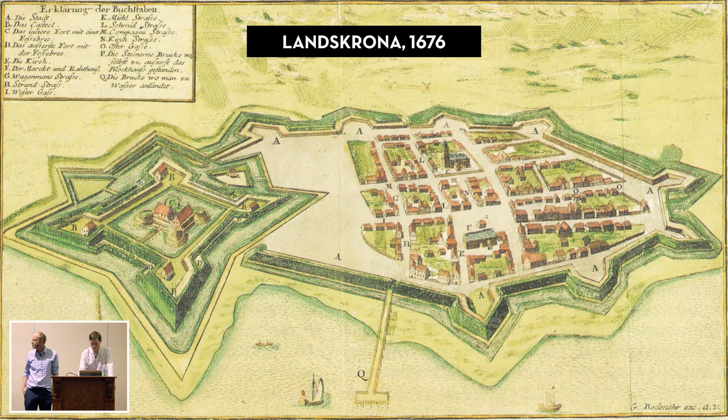The city of Landskrona tried 3D modeling. They wanted a 3D model of the city, so they tried 3D modeling for years by themselves. However, they did not succeed. One reason they failed could be the state of the computer equipment. Or it could be that they indeed have somewhat more up-to-date computers in another room, but good 3D modeling is hard.

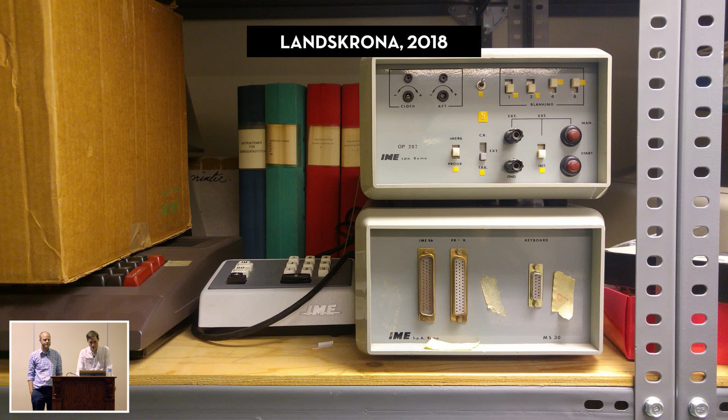Now, we didn't want to commit the same mistakes as others have made. So here's a mini presentation: the fumbling city, misdirected urban modeling for 3D printing.

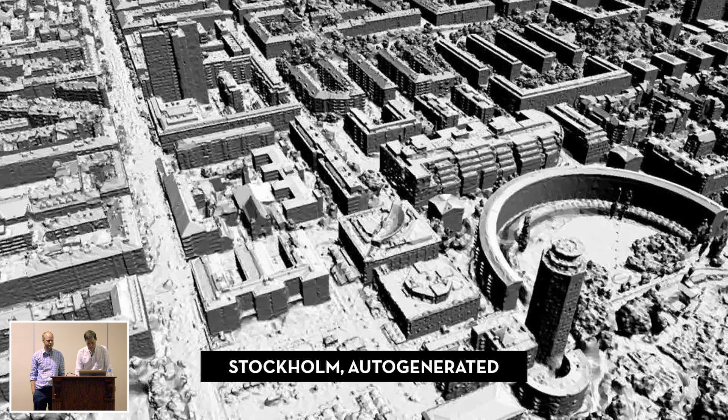So let's avoid those costly mistakes. Is there a one-click solution? Say you've got a point cloud. The dream would be to click a button and then get a city out of it. And it is indeed possible, and this is what you get.

This becomes very quickly an indiscernible lumpy mass which tires the eye. This is a sort of holy grail within digital city making, so there is much research going on in this area, but there is no satisfying solution. Why? Computers are stupid. They lack the interpreting intelligence that is needed to make a good city model. They cannot create aesthetically meaningful choices.

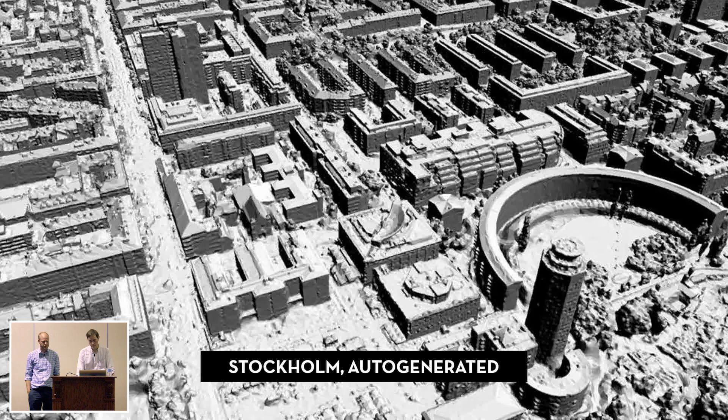So in sum, automatic generation makes you unhappy. You need to do many things manually, but some you can do automatically. Here's another city model. This is Birmingham.

This is obviously 3D printed and 3D modeled. It's colored, but perhaps not so very thought through. It has a certain lack of unity, and there is, I don't know, a bureaucratic and perhaps even joyless character here. You can't really tell what is a road and what is a waterway, and so on. Yet this costs a lot of money.

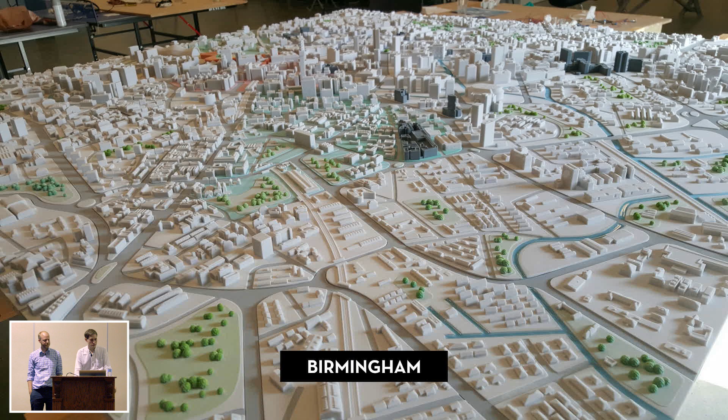And the third example, it's Malmö. They're using the same 3D printer as we are. Their geometry is somewhat better, but look how they have, what have they done with the textures? The materials are functionally unseparated, so visually it's unhierarchical, and it becomes sort of a mulchy mess.

If you look close, the details may or may not be right, but if you look from a distant overview, it's unreadable. Why is that? They've taken probably fairly good 3D geometry, and then they've draped aerial photography on top of it—satellite photographs and perspective photographs and so on. And that makes it hard to read from a distance.

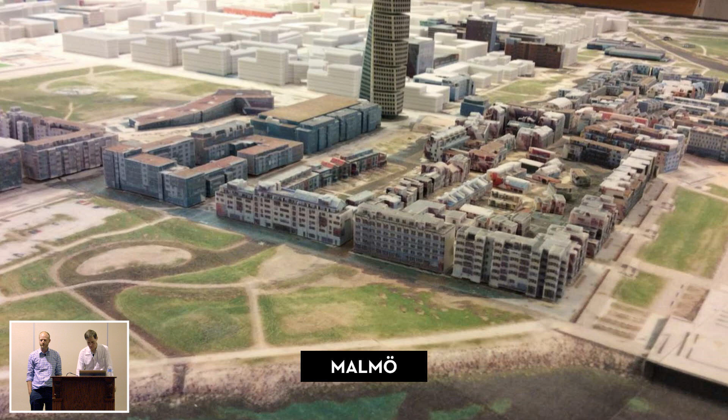So, what's our approach? What is a good city model then? There are some technical criteria. You need empirically correct geometry within, say, a decimeter, depending on the input and what the client needs. The output needs to be 3D printable, i.e. all solids. And the parts need to be individually replaceable if you're making something that consists of several prints, as we did.

What's this? This is a traditional hand-drawn 2D watercolor that we made for another client a couple of years ago. This is no city model, but it's a starting point. What we're after is a sort of effortless visual navigation, yet containing fascinating details.

Discoverability. So it should neither be too cluttered, as we've seen, nor too sterile, as we've also seen. A good model speaks gently. It doesn't scream, and it doesn't whisper. It speaks gently. So colors are really important here when it comes to design.

Judicious simplification is the way to go, and embrace some sort of mild idealization. That makes it readable. Plain, untextured colors work best, that separate functions, yet unifies the whole.

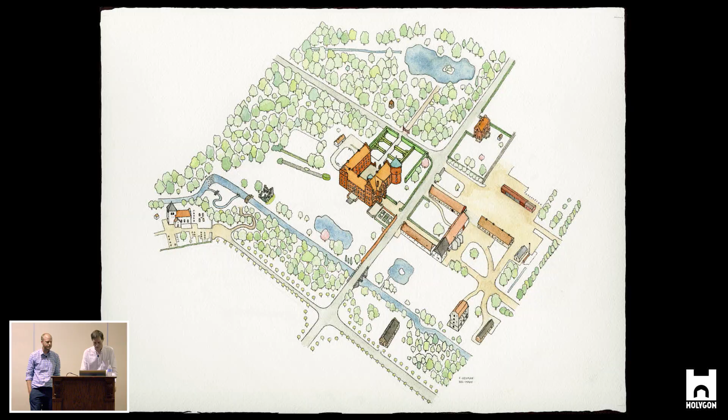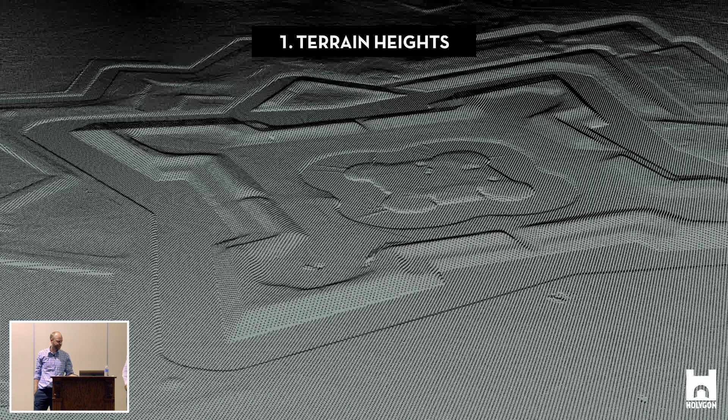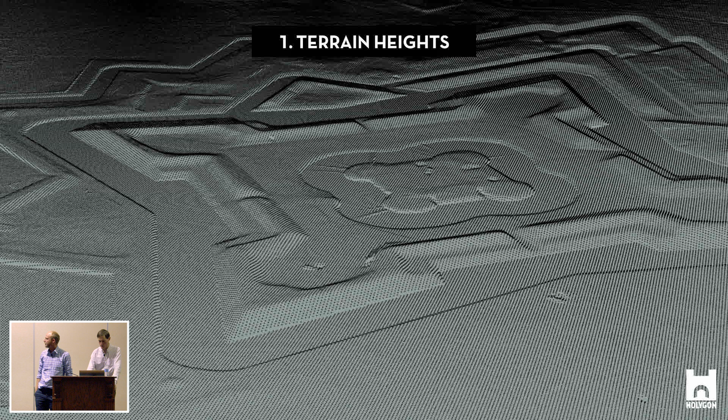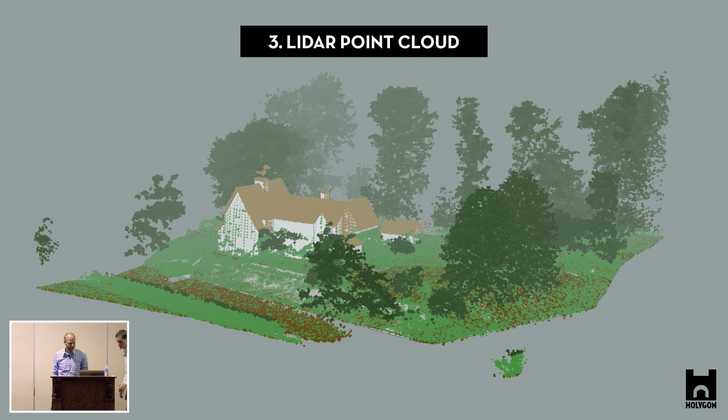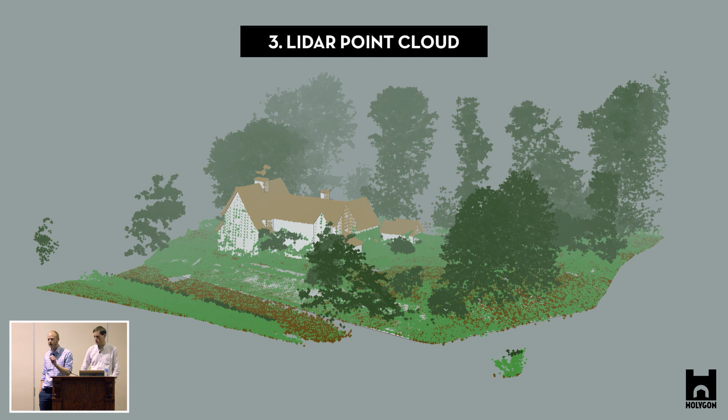And here we have the third input, which is a 431,113,425 point point cloud. And you see just a little chunk of it here. And this point cloud is obtained with a drone, and you have a small laser scanner on it, and it shoots out small laser pulses. And you measure the time it takes for the laser pulse to bounce back, and then you get the point in 3D space.

So, but input is not enough. You're also required to produce some kind of output. And in our main modeling workflow, each input gives rise to an independent modeling track. So in the end, we end up with 3 master models. And these individual tracks have synchronized coordinate systems and so on, so we can just paste in place between them.

And we model in 1-to-1 scale already from the start. And the first modeling track is the terrain. And this is the final state of the terrain. And as you can see, the model will be circular.

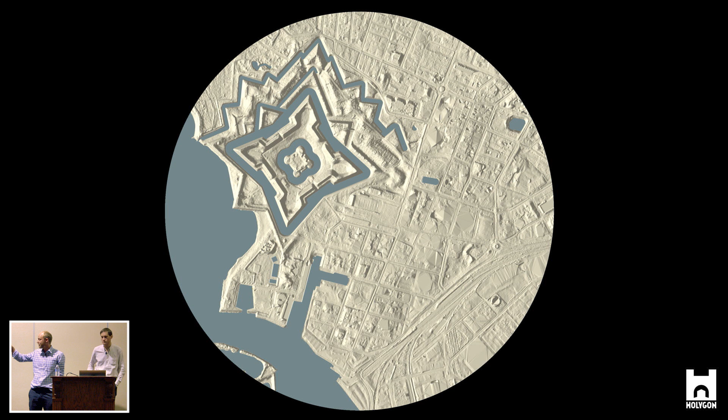It's 1.6 kilometers across here. And in the end, we model in scale 1 to 1,000. So the model will be... We don't model it, we export it. Yeah, we export it or print it in 1 to 1,000. So in the end, the model is 1.6 meters across.

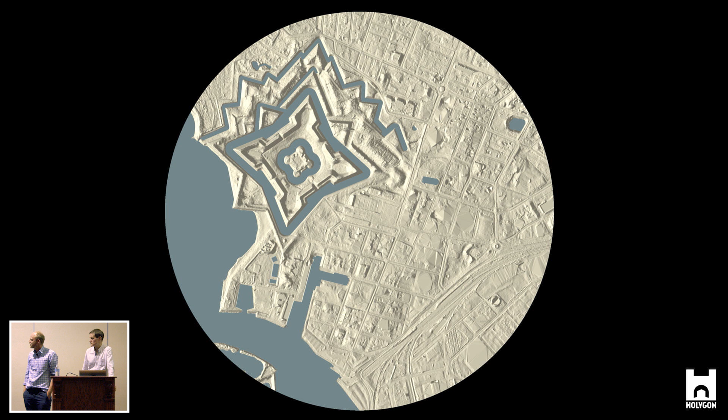And the terrain as we received it was really excellent, but there are bound to be some problems, especially along the coastlines. So here we can see a close-up of one of the moats surrounding the citadel. And what you see in the middle is water, and you can see the vertices on the water. They are extremely jagged.

This is just an artifact from the terrain model, because when you have steep sloping terrain in a regular grid, you will get these directional artifacts. You can also see some other directional artifacts higher up in the terrain.

But we had to fix this, and the way we did it was we wrote an extension that takes all the points lying on the water surface and adjusts them to the red lines here. The red lines are idealized coastlines that we got from the orthophoto. And this was actually very important.

First of all, because those artifacts are visible in the print, even though we print at scale 1 to 1,000. But even more importantly, we do not want to print the water with the rest of the model. Instead, we want to make a cutout into the terrain to insert water of another material, like acrylic glass. So we really needed very smooth coastlines for this to work.

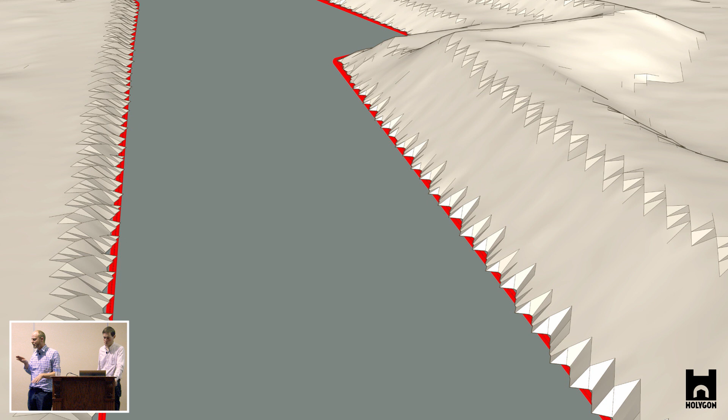And to fix the other directional artifacts higher up in the terrain, we employed very careful smoothing. So we smoothed the vertices. But you have to be careful, because smoothing basically lessens the difference between adjacent vertices, and if you do that too much, the terrain will completely lose its distinctiveness.

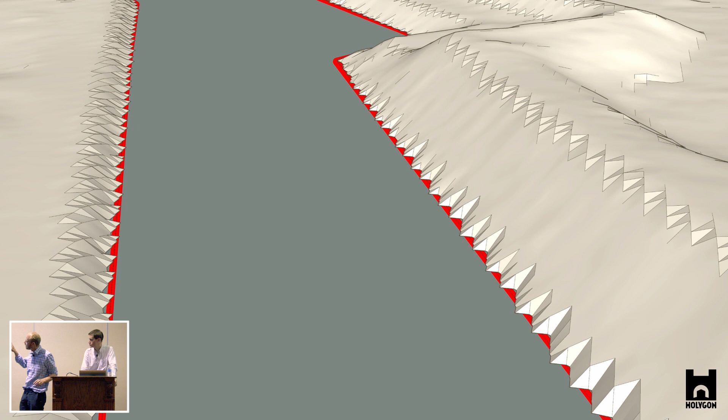So conceptually, what we did was only smooth vertices connected to two visible edges in this image. That way, we only smooth where we need, and all other vertices are left as is. This is the result. There are still some directional artifacts visible, but they're not visible in the final print, so we were quite happy with this result.

The second production track — and do note that these production tracks are independent, so one guy can work on one, and another guy can work on another track. Then in the end, you paste them in place and make a master model.

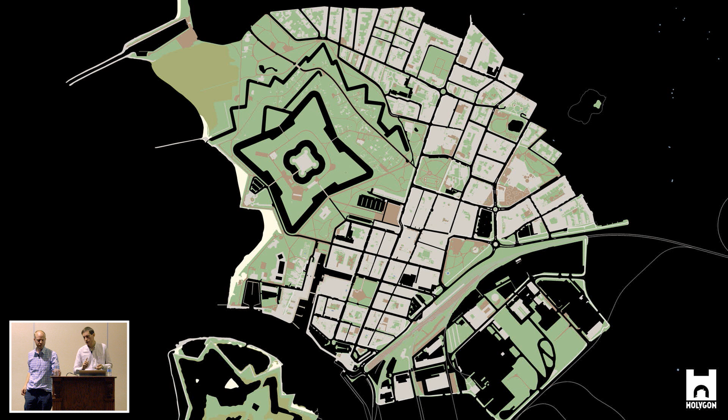So, ground types. You start by picking a number of ground types that represent the entirety well. We had about a dozen ground types — stuff like grass, curbs, roads, gravel, reed, and so on. These were traced by hand on top of the orthographic photo that we showed, and it's all 2D.

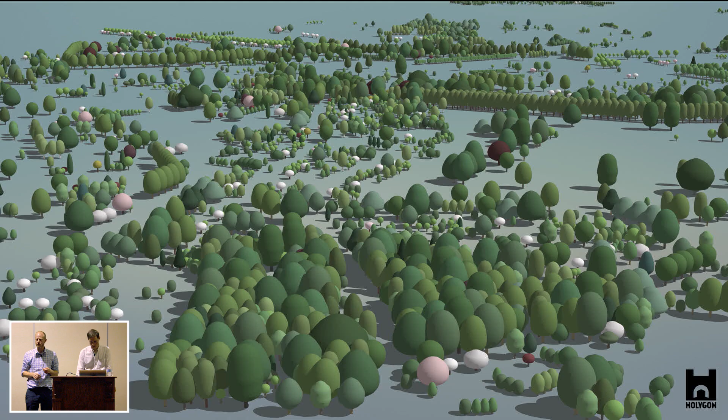More vegetation, still second production track. Here are the trees. You model an arboretum of a number of tree specimens — we used about 40 different ones — and we use them as components, of course. Then you individually place each tree, matching for position, size, and type. The master model has about 5,600 trees.

Okay, and finally we have the gigantic task of extracting the actual buildings. What you see here is a screenshot from SketchUp of exactly what it looked like when we extracted the building, so you see color by layer.

It's a typically sized point cloud — it's a city block, about 500,000 points. The resolution is about 50 points per square meter, which I think is about 5 points per square foot. You can also see that the roof points are black and the facade points are blue.

And we got a pre-classified point cloud, so we could import these classes independently and then assign layers to them in SketchUp. This differentiation is actually very, very good to have.

You can see the green faces — those are roof planes or roof faces we have already extracted. You can also see there are not many points above or around these roof planes, and that's because once we've extracted a couple of roof planes, we just select a big chunk of points around them and press the M icon up there. Then all points within a certain distance from the planes are moved to an invisible layer, because in point cloud modeling, visibility is really king.

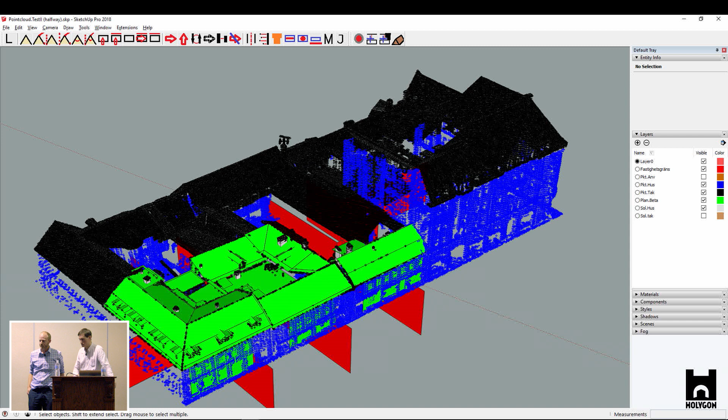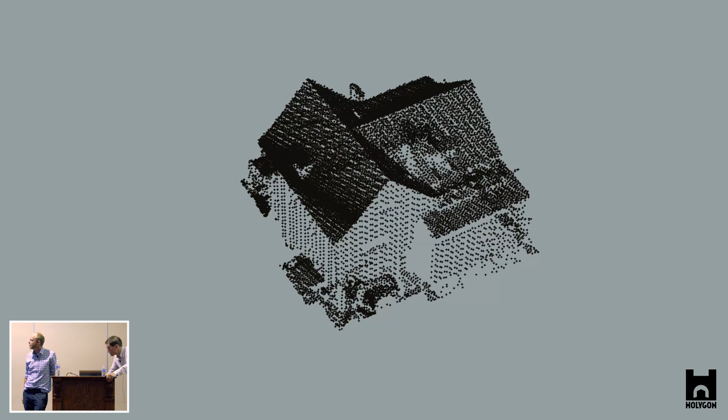Okay, so here we have a point cloud. What do we want to do here? We basically want to reverse engineer the architect's SketchUp model, which contains a lot of roof planes. We know these planes are embedded in the point cloud somehow, it's just a matter of extracting them. In this image you can see all the roof planes extracted. Extracting a plane isn't very difficult, you just sample a couple of points and estimate the best fit plane.

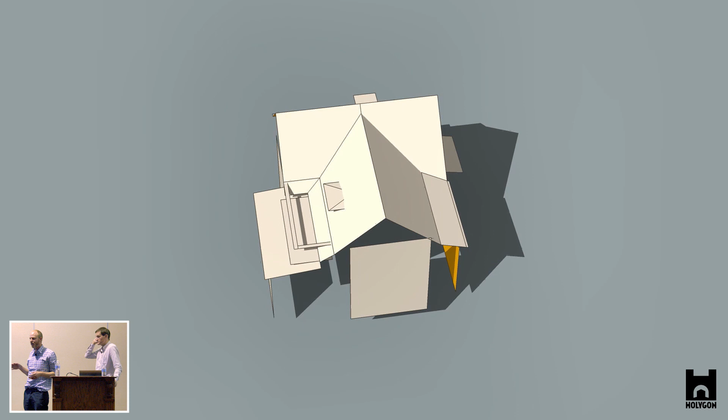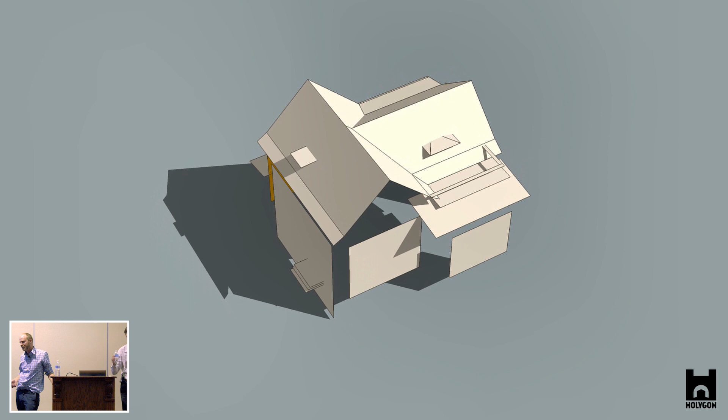But you have to be very careful, because if you have a saddle roof and sample the plane for one side, then independently estimate another plane for the other side, and intersect these two planes, you'll end up with a ridge that's almost certainly not exactly horizontal. If this saddle roof extends beyond a corner and you repeat the process, you'll get a new ridge that's almost horizontal, almost at the same height as the first ridge, and they almost join at a common point. That sounds almost good, but it's not, because this geometry is almost impossible to fix.

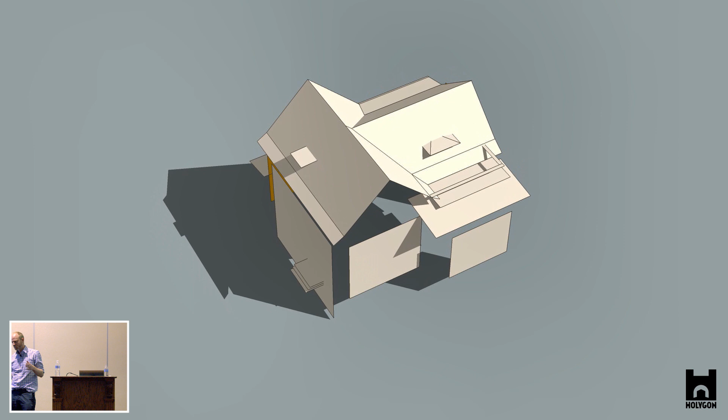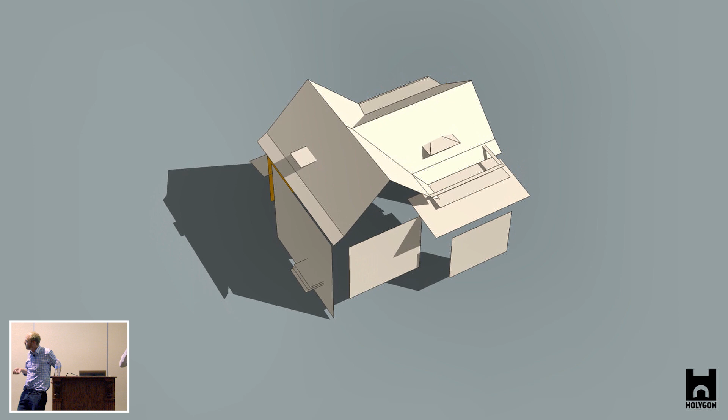So the way to fix this is that when you extract the planes, you impose external constraints. For example, we have a saddle roof tool, so we sample a few points from one side and a few from the other, and then extract two planes but force the ridge to be horizontal. We can also force things like the height of the ridge, the direction, symmetry, whatever. So we had 11 icons for extracting roof planes, but basically just 2 tools: either we extract a saddle roof or a single plane, and the 11 icons are just the useful permutations of our external constraints. The whole point is that we force the geometry to add up at the earliest possible stage, so we get very nice geometry very quickly from the point cloud.

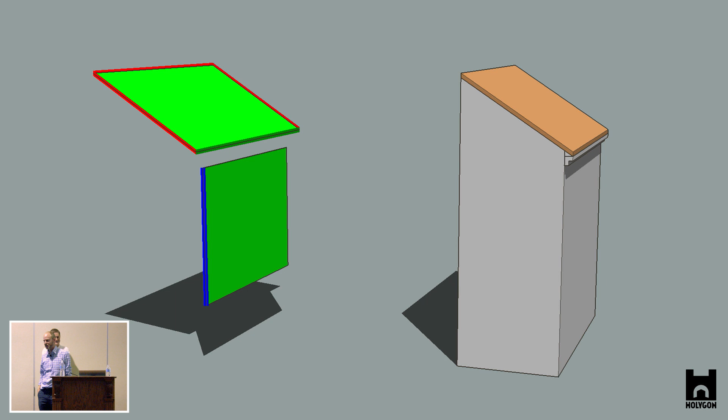So we have a couple of roof planes, and we want to solidify this to get 3D geometry. The solidification process works one roof plane at a time. We also want to model these roof overhangs because we want subtle shadows along the roof. To the left you see the input and to the right the output, normally they're on top of each other but we've separated them here for visual reasons. The tool itself is very simple.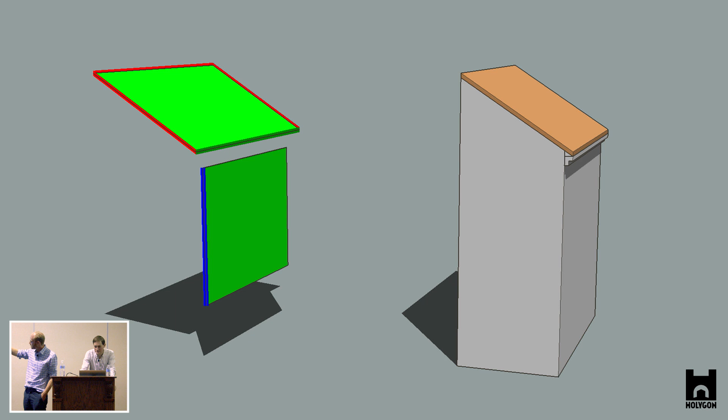You select your roof plane, it becomes red. You select an edge where you want an offset, then select the corresponding edge on the wall, which is blue. You press Shift and get the result to the right. We get between 2 and 3 solids out of this process: a roof solid, a building solid, and optionally a cornice joining these two pieces. This is a rather quick process, but it's a lot of clicking because we have a lot of roof planes. It works very well, actually.

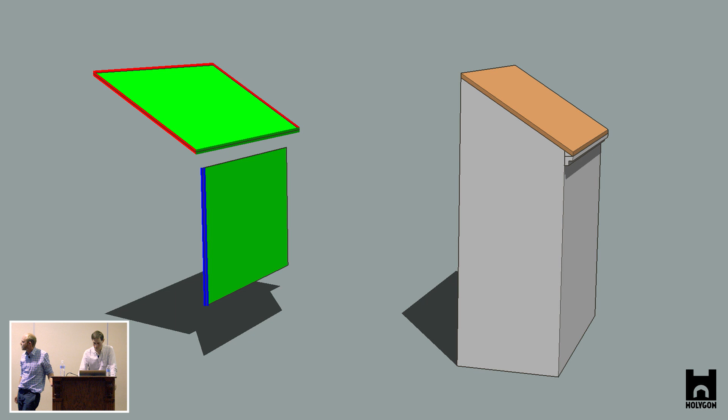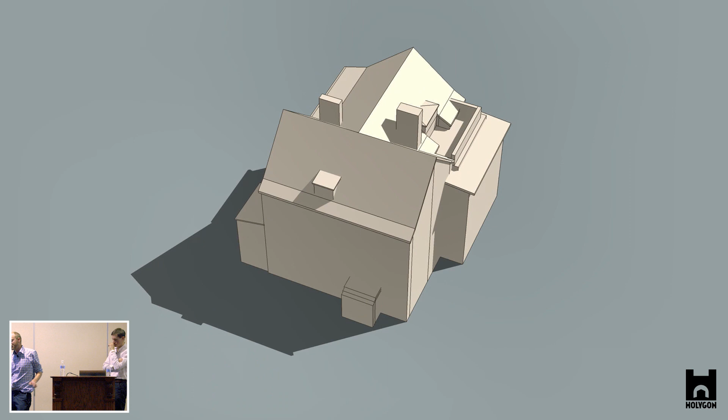And here you can see the final solidification. I should also say, regarding the point cloud tools, there are two things very native or core to SketchUp that we actually want to avoid. The first is stickiness, and we avoid that by embedding extracted roof planes in a group so they can be adjusted independently. The other thing we want to avoid is dependence on the modeling axis, because in a late medieval city like Landskrona, there is no such thing as a right angle.

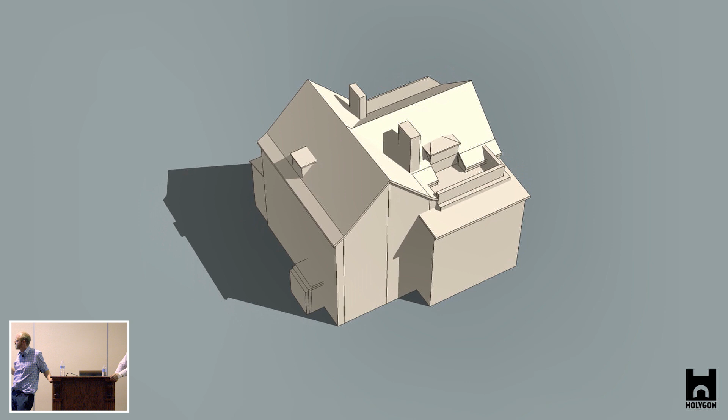The general outline of a city block has 4 edges, none of which are parallel or perpendicular. If you're dependent on the modeling axis, you may align it with a ridge, but then your gables will be off in 2 different directions. So it's extremely tedious. But when modeling in point clouds like this, you become independent of the modeling axis.

This is what it looks like after we've solidified the roof planes. You can see we don't have much facade detail, because we didn't have the data, and we didn't have the time either. We're very dependent on having detailed roofs, because dormers, chimneys, terraces and stairs all provide a sense of scale. If you remove those details, it would be almost impossible to tell the size of the building. All those details also provide some life and vibrancy in the model.

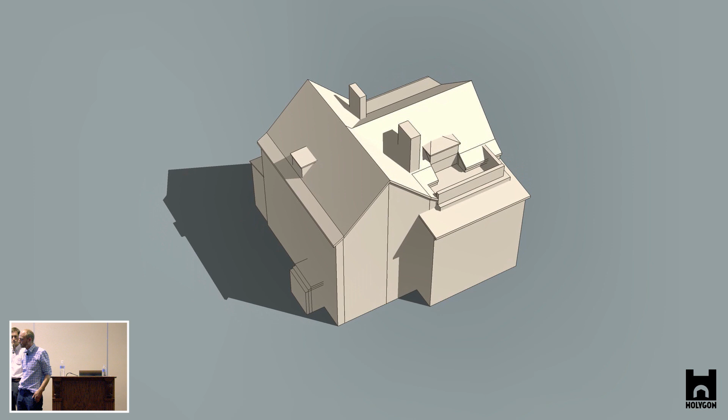In order to make this project fly, there were some workflow challenges. One is empirically correct buildings and roofs - that's probably the hardest part. Another is the sheer size of the model, necessitating bulk operations on tens of thousands of groups.

The workflow in Holygon relies heavily on proprietary scripting. If there's something we can't do in native SketchUp, we write a script and make it happen. For this particular project, we wrote about 45 scripts. Some were big ones we used all the time, and some were one-shot snippets used once, but may still save you a couple of days of work. There are some semi-automatic parts to the workflow, but it's really labor-intensive.

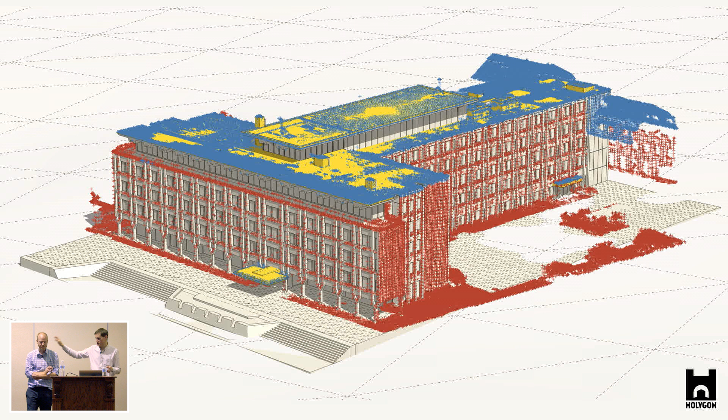There is also specific printability to consider. Our client in this case used the ProJet 660 Pro. It prints in stucco - down in the Knowledge Cafe there are some samples from the big model, so you can get a feel of the material. Stucco is gypsum powder, a slime binder, and color.

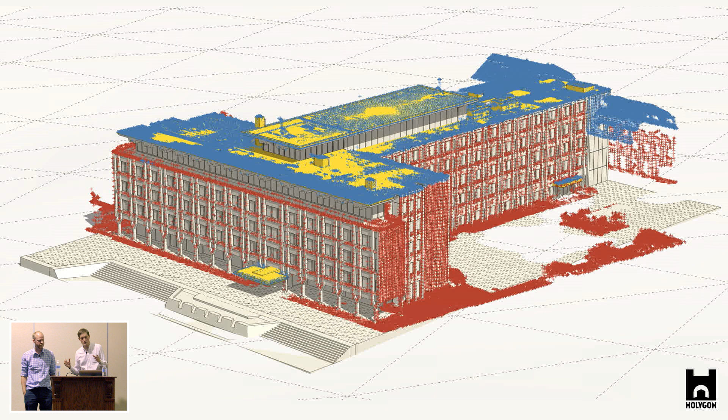You want to make sure that the things you're 3D modeling will survive printing. About the only change we made was the thickness of the tree trunks - they needed to be thicker than they really are in order to survive printing. But otherwise, almost everything has the same dimensions as in reality.

There is no 3D color printer that can print the whole thing in one go, so you need to slice the master model into smaller pieces, make them one by one, and send them off to the client. Either you can take the whole model and slice it with a rectangular grid, as most people do, but we chose not to, because that gives you unsightly seams that can go right through buildings or trees, cutting half a tree off.

Instead, we manually drew lines between the pieces so each piece fits in the printer's printing box, and we cut along roads and waterways, so we could hide those potentially ugly seams. We've got a master model, or 3 master models, and made this map of all 40 pieces. Now we need to make the pieces themselves - 40 pieces we can export and give to the client for printing, or the printing service.

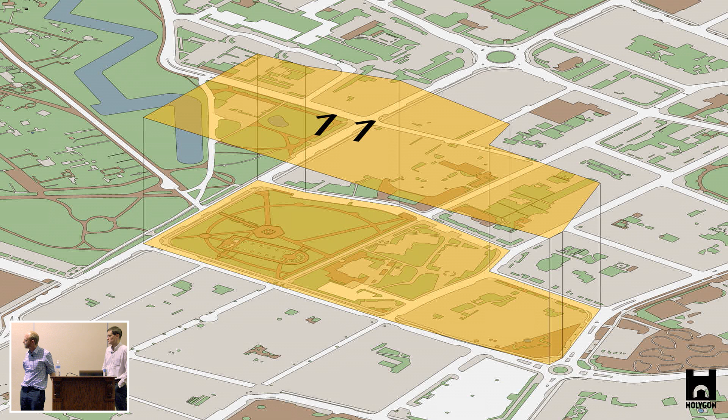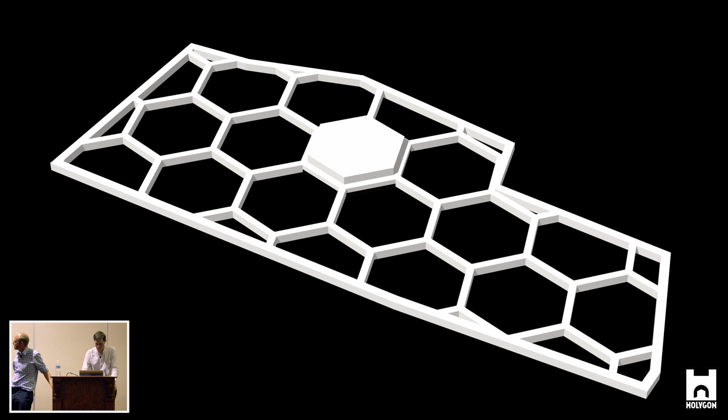We have a script that cuts out from the master model all relevant geometry, so we could easily collect the geometry we needed from all our 3 master models. From the polygon, we also automatically generate a base, which looks like this - a honeycomb pattern to save some weight. On one of the hexagons we add a small brand, which uniquely identifies the plate.

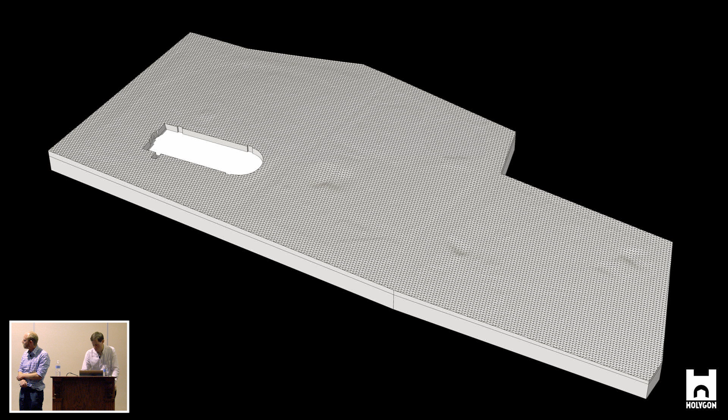We cut out the terrain and automatically solidify it and add it to our base plate. By the way, you can see a cutout in the terrain over there - that is old church ground. There is no church, it's just the ground, but it's recessed into the ground, and you cannot represent the vertical slope in the terrain model. So we made a cutout and put it in as a separate piece.

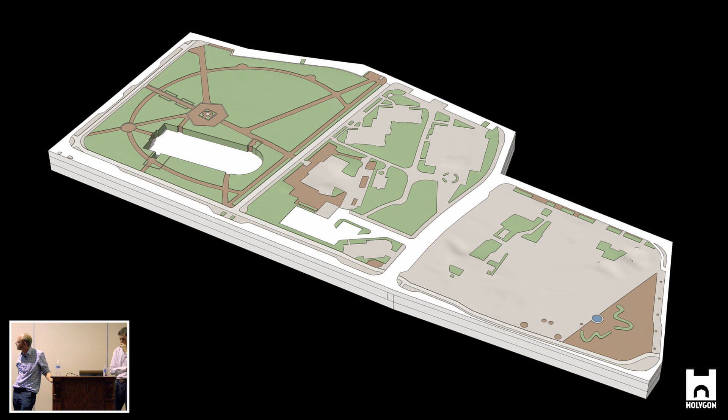These are ground types, extracted in 2D, but we just drape them on the terrain, and they receive their solidity and volume in the draping process. The different ground types have a different constant vertical offset to the terrain - the curb, which is gray, is about 20 centimeters above the terrain, while the grass is about 30 centimeters above. So in addition to color separation, we also get some kind of geometric separation between the various ground types.

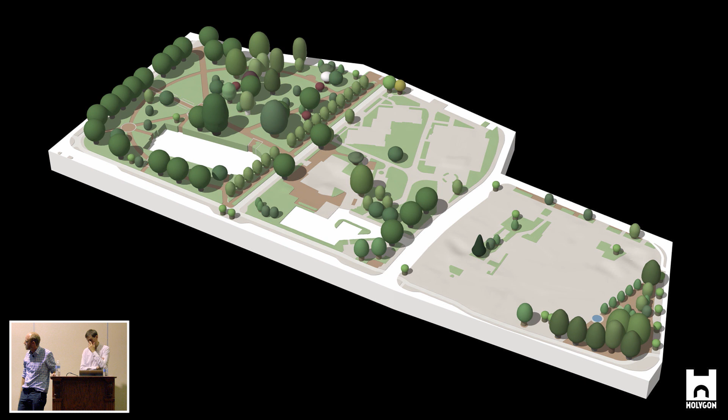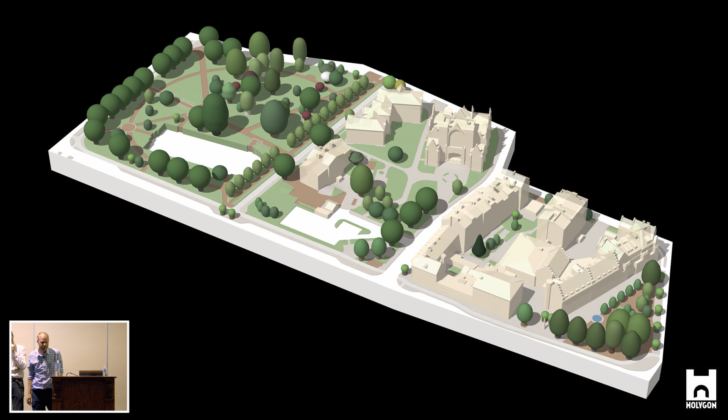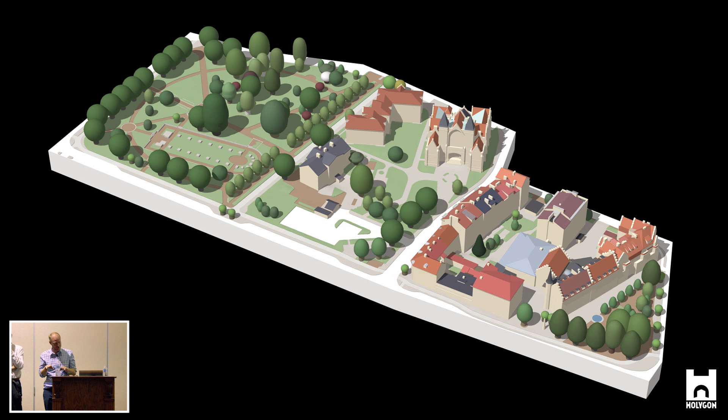The trees are just dropped straight down onto the terrain, as you can see here. And finally, we paste in the buildings, as well as the roofs. You can clearly see here that we have the roof solids and the building solids - they're completely separate, which is actually quite nice to have.

So this is plate 11. It's about 1,000 solids in this state, and this is what we export to OBJ. So the final solidification of all these 1,000 solids takes place outside of SketchUp. In addition, we also add a small tolerance to the plate - we cut off a quarter millimeter, so when we build up our final puzzle, there is some tolerance between the pieces.

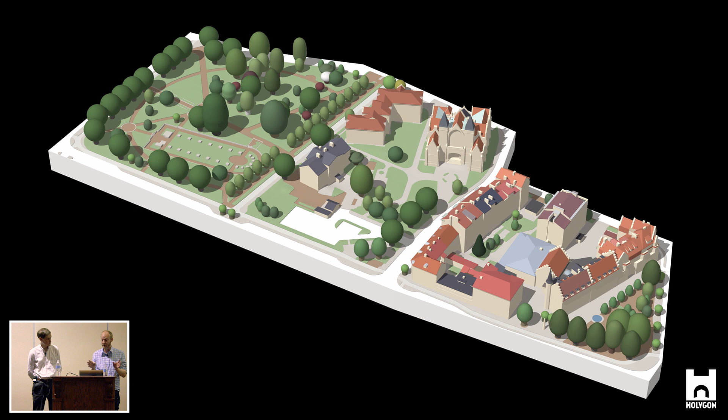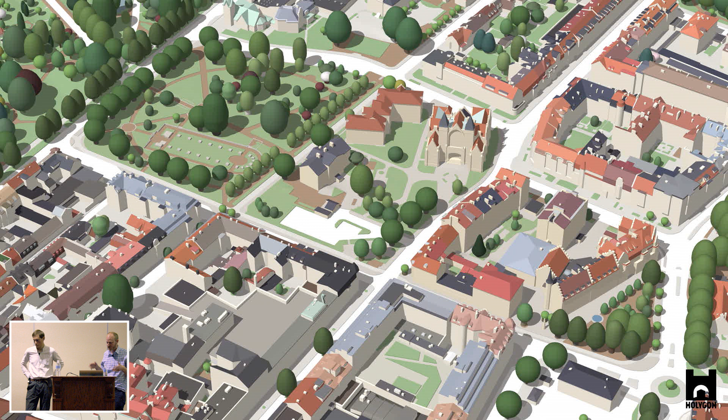This process here is repeated 40 times, and we get our complete models. It could also be worth reflecting on how these solids are actually created. When you think about it, almost all solids here are created programmatically from various two-dimensional inputs - the roof planes give rise to the roof solids and building solids, the two-dimensional ground types are solidified and receive their volume in the draping process, and so on.

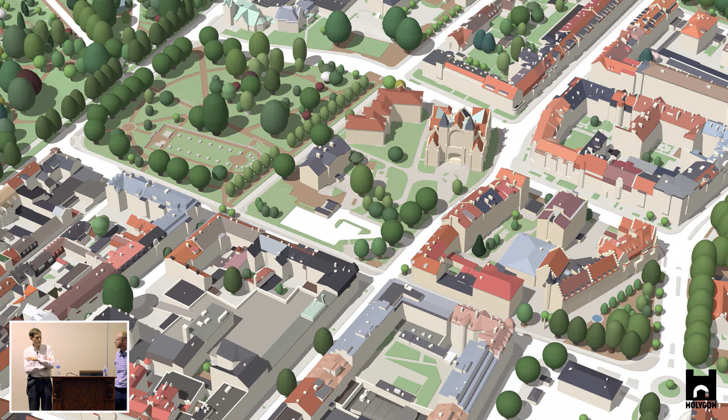In the end, there was not much manual solid modeling in this project, and we think that's a good general modeling advice: keep modeling in 2D as long as you possibly can, and go 3D as late as possible in the process, as a general rule.

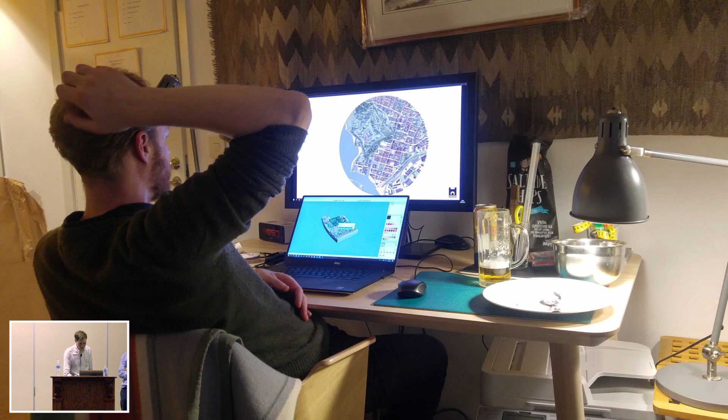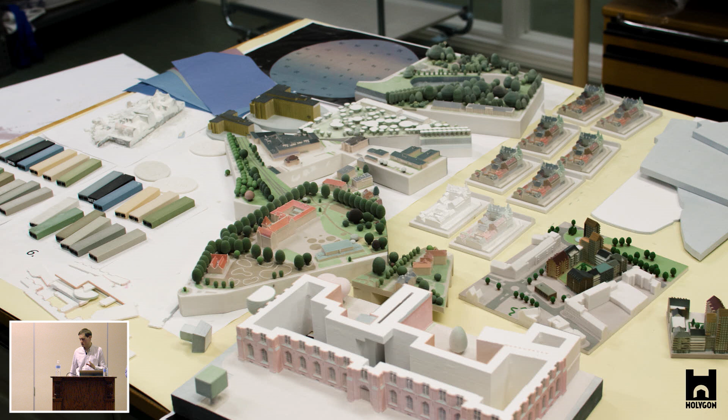So here you can see, by the way, the printing studio at Landskrona looks a little bit like this. You can see, for example, the different color tests. We did a lot of color tests to get the colors right, because there are so many things that happen between the screen and the final print, so you need to test it.

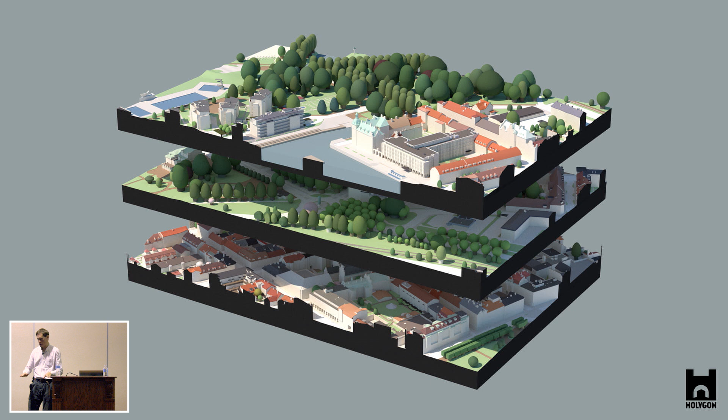You load a couple of OBJs into it, and you tell it to start working, and hopefully next morning something comes out. In one night you can print 3 plates, 3 pieces, and you can stack them on top of each other because it puts out very thin, 0.1 millimeter thick layers of gypsum powder, and builds on top of that. So you don't need support or anything.

This is a render of what it may look like, but really in the print chamber, the whole thing is covered with white powder, so you need to vacuum that out in the end.

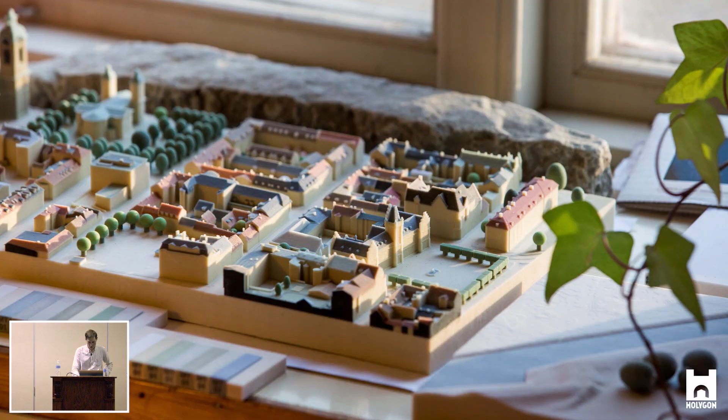Here's the very first test print in our office. I think perhaps we should take a closer look at what the finished result looked like. So do we dare to compare? We have input and we have output. Let's look at that. Yes, we do dare to compare. It's too late to back off, there's already a slide telling us to compare. So let's do it. Here is the top ortho photo, or part of it.

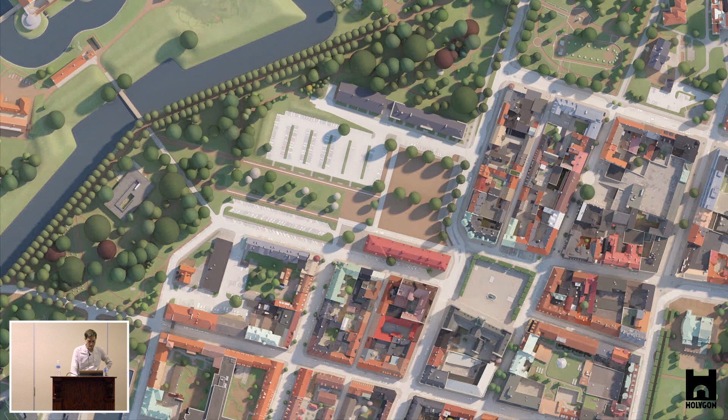Input and output. The lighting is a bit different here in our rendering, but if you look at the limits, the borders of the images, you can see it fits quite well. In fact, it fits very well.

Let's compare again. Here is an aerial photograph of central Landskrona, and here is our model rendered from approximately the same position in space. See?

Let's compare again, let's look at the prints. Here we are, our friend piece 11, in a SketchUp view. This is just SketchUp, and here it is printed. So: SketchUp, print.

The digital model completed - let's look at the digital model. We've just seen parts of it. Here is, well, let's start by hovering over piece 11 on a dewy, misty morning. And let's zoom out and re-render, and you get a bigger picture of what it looks like.

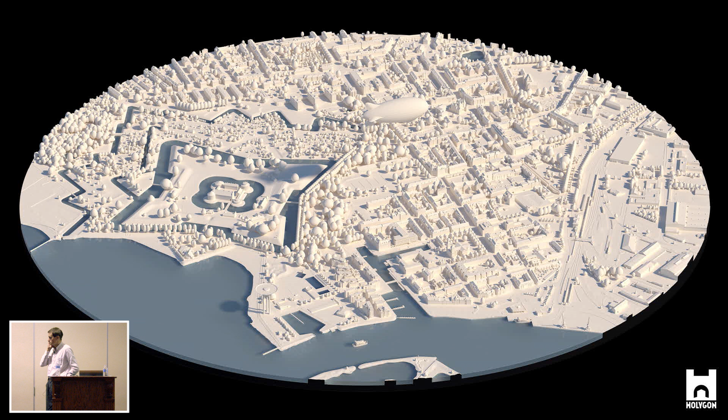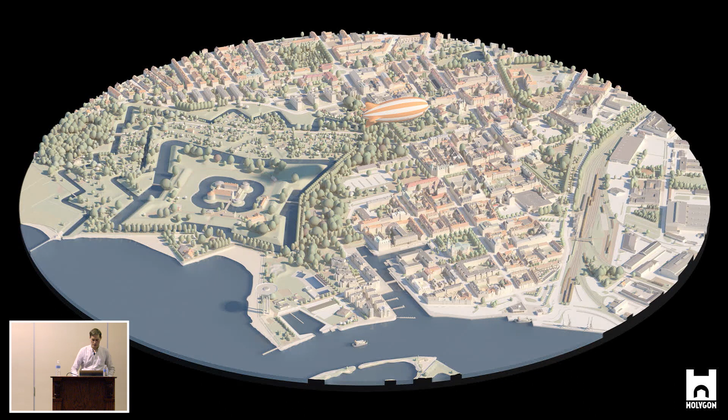The finished digital model contains roughly 35,000 geometry groups. And here it is again, the whole thing rendered with materials. It took us more than 1,000 man-hours to complete the digital model.

And there are prints of this outside in the gallery as well. The physical model, it got completed as well. So let's look at the printed results.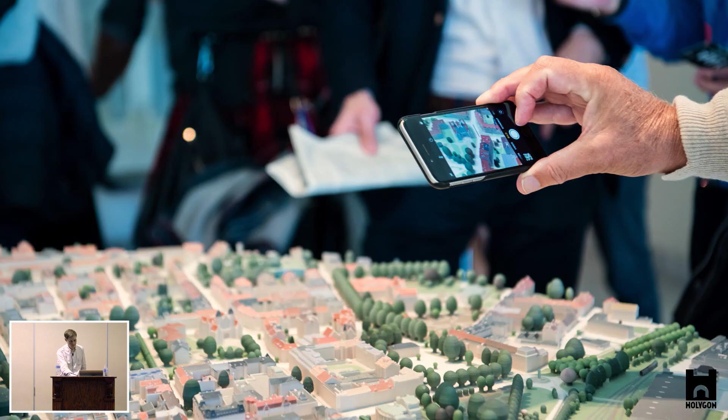The inauguration, exactly 2 weeks ago - not to the minute anymore, but to the hour - was in the Landskrona City Hall, and still there. It's a permanent public exhibition.

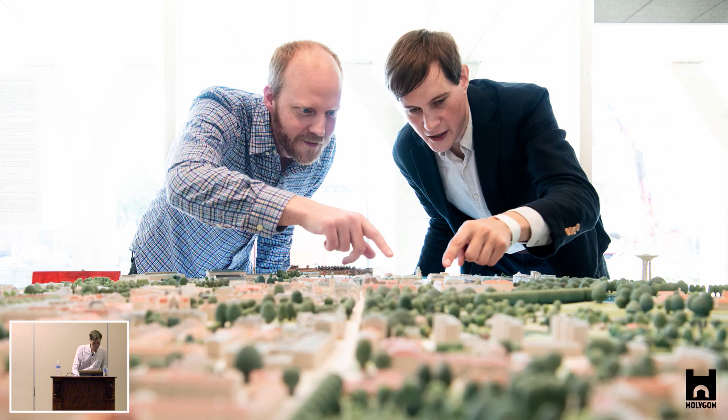And apparently we were not the only ones interested in piece 11. Here are the model makers assessing the results, and here is Landskrona Planning Director Johan Nilsson assessing future developments. He was very keen on pointing out all the places in Landskrona he wants to develop.

You can note here that the water is represented not in stucco but in acrylic glass, so it was laser cut separately in order to give those reflections, to provide some life to it.

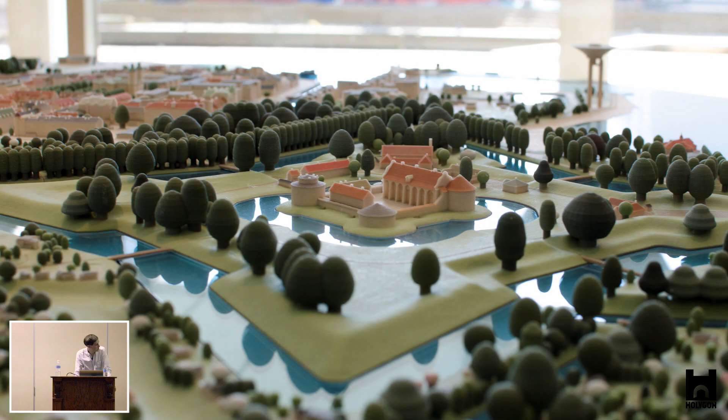A lot of spectators were there and they were interested in discovering details. What are these people looking at? Perhaps they're looking at the 16th century castle, or they're looking for a new apartment, or remembering their old place, or getting lost in the allotments that are like small mini gardens that we have in Sweden - gardens within the city called allotments.

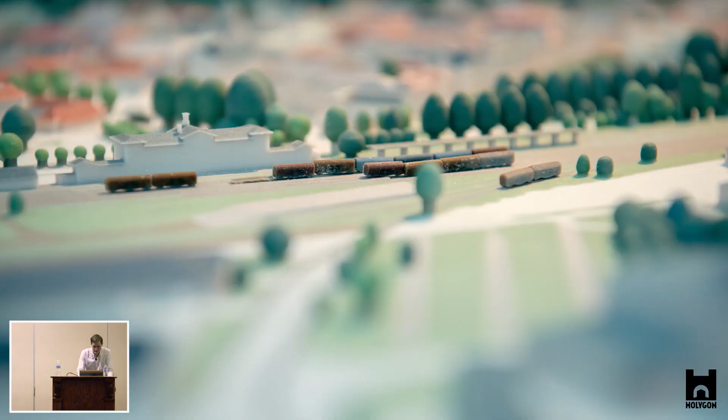Or living the Swedish dream of conquering the Danish stronghold. Or perhaps they're looking for a train ride southwards to Malmö, Copenhagen, Berlin. So the thing is you need to put a lot of fascinating little details inside there so people can discover - they love that really.

And here is the entire 3D printed city model. Right now it is Sweden's largest public full color printed city model. But of course with sufficiently narrow criteria everything becomes a world record.

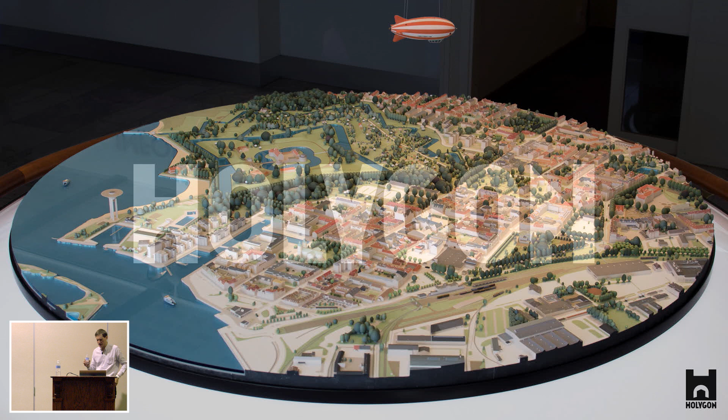So at Holygon we are cutting edge not only in a technical sense. Because what, after all, is the point of being technically correct, yet failing to arouse an emotional response?

So the city modeler's task is to convey a certain feeling of home, even though the spectator may never have been there before.

So our ideals are readability, durability, beauty. That makes for a timeless model. What will remain of us once we're gone? Sites of interest. Beautiful things worth discovering.

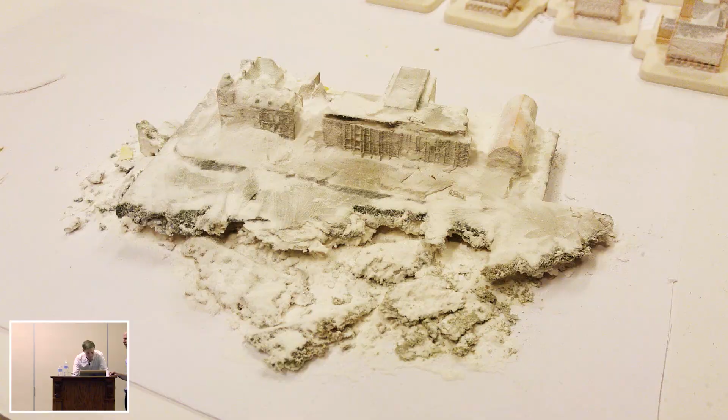Yes, it can be so. When it comes to detail, I think what mainly decides the level of detail is the amount of time. So we concentrated on the roofs—if you start to dabble with the facades, you easily double the time it takes to produce the model, and there wasn't data for that here.

But here you see the town hall, the council hall, and it's much larger—that's scale 1 to 200, so it's much bigger. It isn't finished there; the printer gave up midway. So we made another one.

So yes, you can do that, but then you need to add more details, and perhaps an even better point cloud. I think the takeaway is that scale really matters, and you need to adjust the details to the scale. If you just add 20% more details, that can add a couple of months of work. So you need to think about which details really bring a sense of scale.

Obviously you researched this - what would be your choice of material to print? Some kind of polymer instead? No, I think they made the optimal choice. This printer is excellent, really excellent when it works. It's not entirely reliable, and they actually have problems printing the model, but when it works, it's really, really good.

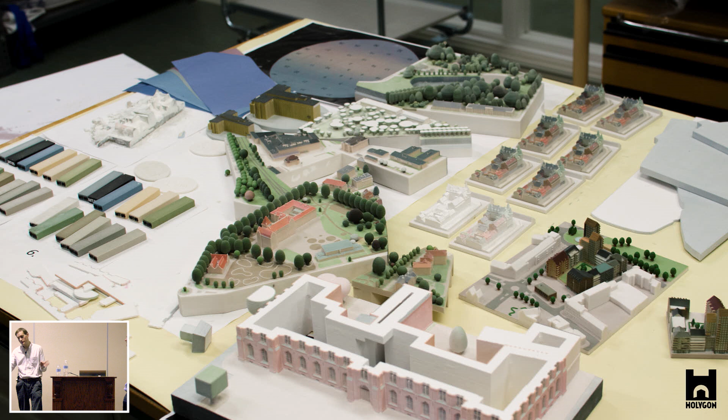People don't really buy them - they're giving away all the things down there in the Knowledge Cafe. Well, that was the request. We made them before. Yes. No, but you understand what I'm saying - you don't see it in Walmart, you don't see a 3D printed thing made with a MakerBot or something. That's for quick testing at home and so on.

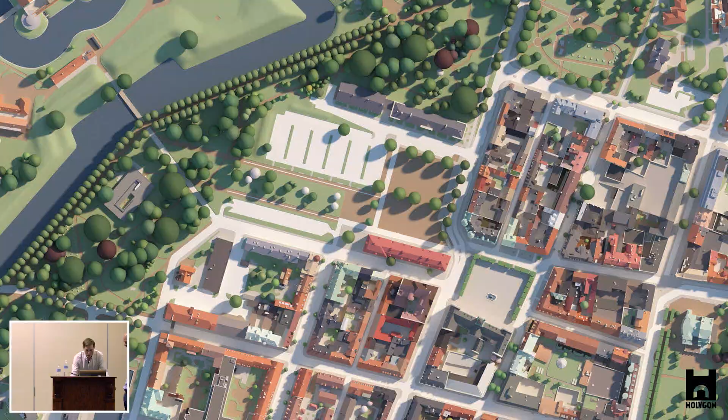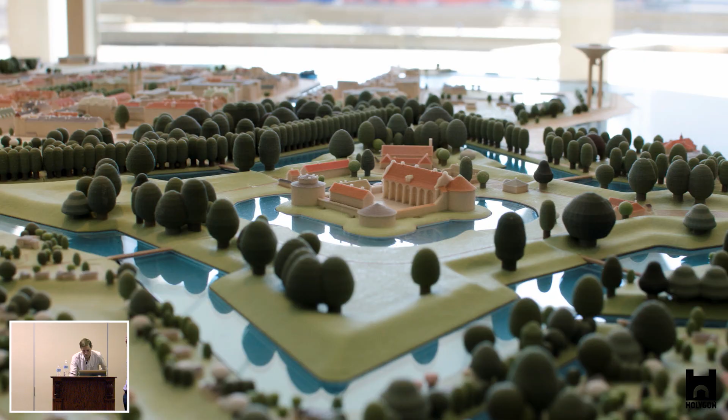But if we hadn't used colors, then I think you could have printed it monochrome. If you wanted it monochrome, then maybe - what's the name - porcelain would be. Then it would have looked something more like this, perhaps, with a separate water in something else. You can print in ceramics, but you can't print color with polymers. You can't choose different... I don't know.

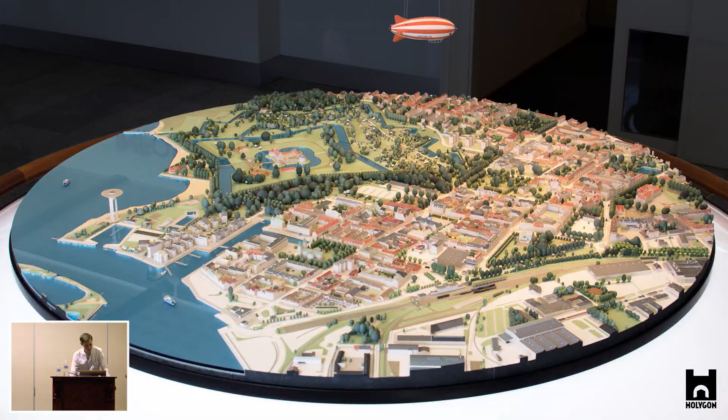Okay, go back to that image that you had before. Which one? Before you just rifled through all the monochrome, little pieces and papers on the model. I'm not sure - this one? The one with the color test. Okay, the colors.

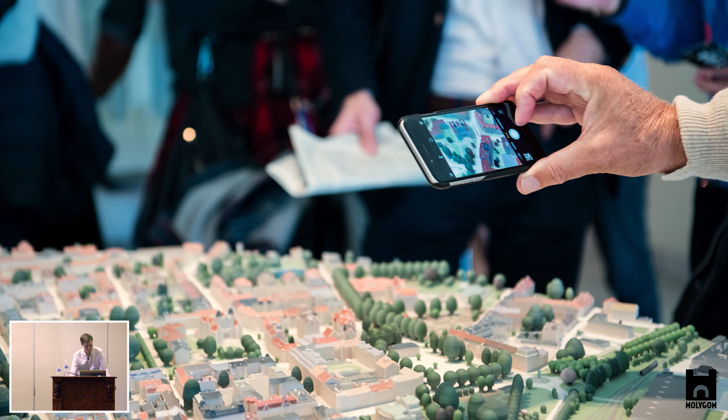Does that answer your question? It does. So the water is actually done with paper? No, the water is done - we exported a DWG so the acrylic glass company could laser cut the water because we wanted the reflections. Okay, good. We should also say the material test is very important, because it looks nothing like on your screen - you really need those in order to understand.